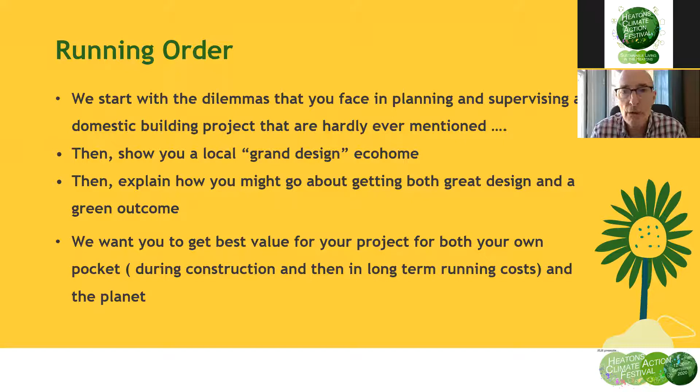So we start with dilemmas that you will be facing if you are planning to do a project, domestic or otherwise, and that's the running order. Then we intend to show you our grand home, the one that Steve has done. Then we'll get into a longer explanation through Sarah about how to achieve great design and a green outcome. In all of this, we want to get best value for your project, both for your pocket during construction, and in the long-term running costs. And if we achieve that, then of course that will be beneficial to the planet anyway.

So the Green Buildings Council, in a report a couple of years ago, reckons that the UK's 28 million homes really are not future ready. By that, not ready for the future that the government has said we should have by 2050 to be carbon neutral. Our homes aren't compatible with a climate change future, and they're going to substantially undermine the UK's ability to reduce its carbon emissions if we don't start changing.

Overall, the English housing stock has an average EPC rating of only D. That means most homes are leaking energy badly. They're incurring higher energy bills than they need to, and there's a whole set of associated detrimental impacts for many people. However, change is upon us.

That change isn't necessarily one we want to hear about, because it's about space heating costing us more. North Sea gas will be running out. Many of you may not know that boilers for North Sea gas will no longer be installed in new homes from 2025. That's not very far away. And at Greater Manchester level, the projections suggest that we have to have much more energy efficient homes, a lot more electrical heating from heat pumps in our homes, and that there will be some boilers using hydrogen gas by 2038.

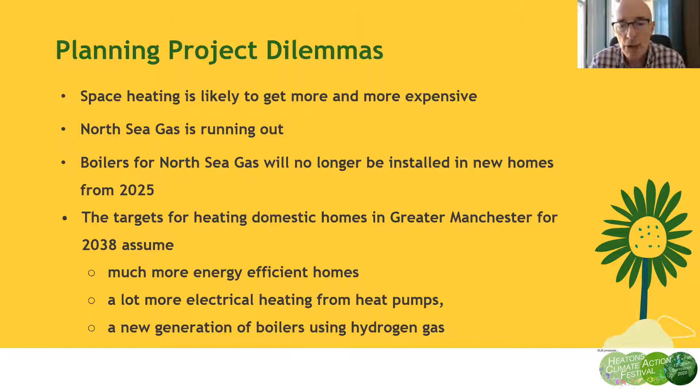So there's an energy challenge going on. The retrofitting of our existing homes is the biggest challenge in transitioning the UK built environment that there has ever been. At a personal level, most of us can only afford to improve our energy efficiency over time. So as we repair and improve our homes, there's an opportunity on each occasion to do a little bit each time to improve the way that we green our properties. So we hope this presentation is going to help you do that.

Within the Greater Manchester energy targets, bearing in mind Greater Manchester's seeking to make the city carbon neutral by 2038, they have taken an approach they call the fabric first approach. This is about building design and reducing the amount of energy required to heat a building. They say the first priority is to prevent heat loss through walls, floors, roofs, and openings. To do this requires greater and better performing insulation, an airtight build, and design to avoid thermal bridging.

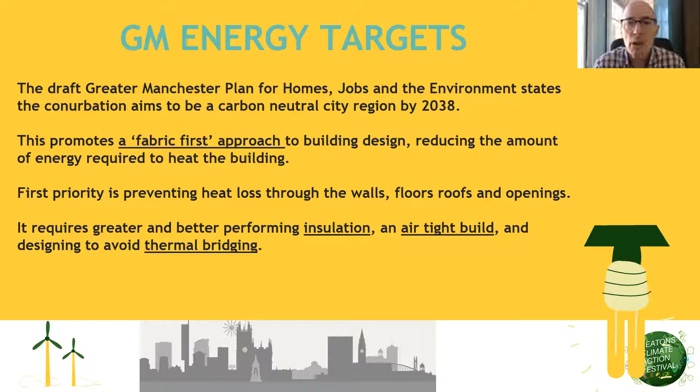So what do all those words mean? I want to give you an example that comes back to us personally as individuals. First of all, can you imagine you're on Heaton Moor Common at the moment? It's November, there's a cold wind blowing, we're outside, we feel cold. What do we do first? We check our clothing, we consider how we're dressed. If you were in your own home, you'd be doing this in a different way but in the same sense - looking around you and checking doors, windows, gaps and drafts. Broadly speaking, you'd then be taking a fabric first approach.

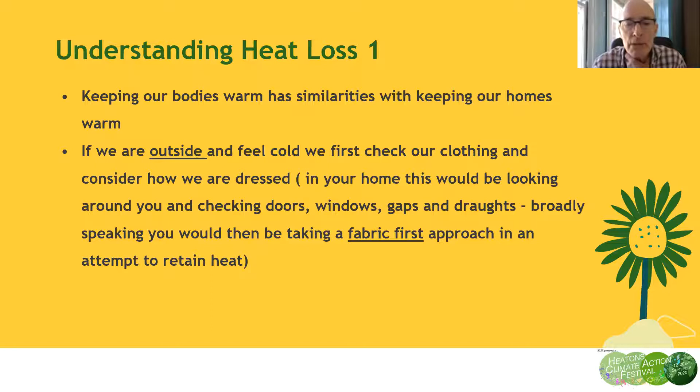So that didn't make us feel any warmer. We're still cold, so we put a jumper or fleece on. In our home, we'd call that adding insulation - putting something warm against our skin where before it was cold.

Once again we're not feeling warm enough, so we put a jacket on and zip it up to retain the heat. Still we're feeling cold in certain places, around the neck and hands, so we put a scarf and gloves on. That is what we call avoiding cold bridging.

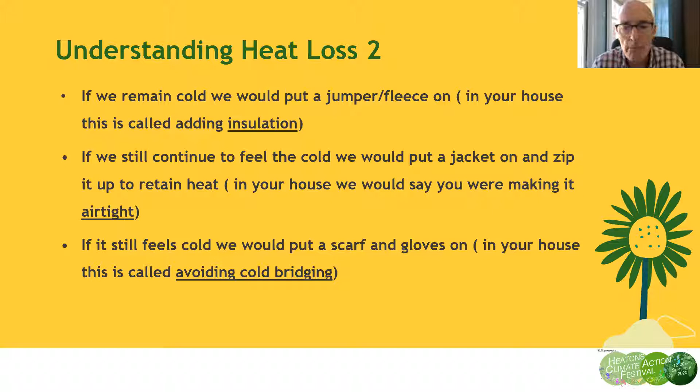So there's the three words I'm introducing you to: insulation, air tightness, and the avoidance of cold bridging.

That's understanding heat loss 3. But what about moisture? We have to consider moisture in all this. If you were exercising indoors, you'd take measures to ensure any sweat and evaporation could be carried away.

We do this to avoid both smelling and condensation occurring in our clothing. In your home, you'd be doing this as well, but to avoid smells from cooking and moisture from baths, showers, and washing. We do that usually by opening windows or putting mechanical extraction on to take the damp or smelly air out of the house.

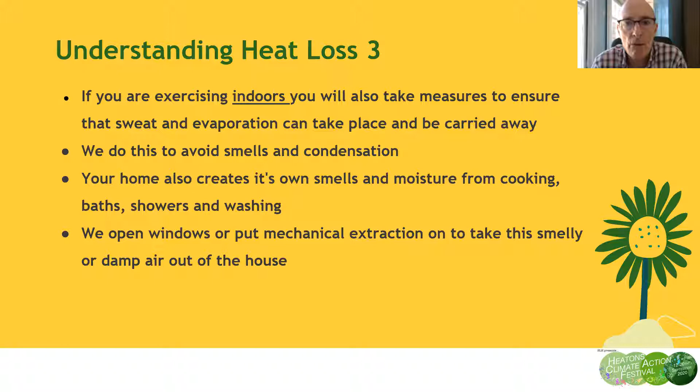Most older homes leak considerable amounts of air all of the time. Certainly anything built in the Heatons that hasn't had considerable work done to it recently, built before about 1960, would be leaking considerable amounts of air. Even some newer properties to the end of the 20th century are still considerably leaking.

So we've got to do more to improve the ability of our homes to retain heat, through this combination of insulation, air tightness, and elimination of cold bridges. We can avoid the moisture problems if we apply foresight to our project. This requires knowledge, good design, and you'll achieve a comfortable home without all sorts of difficulties.

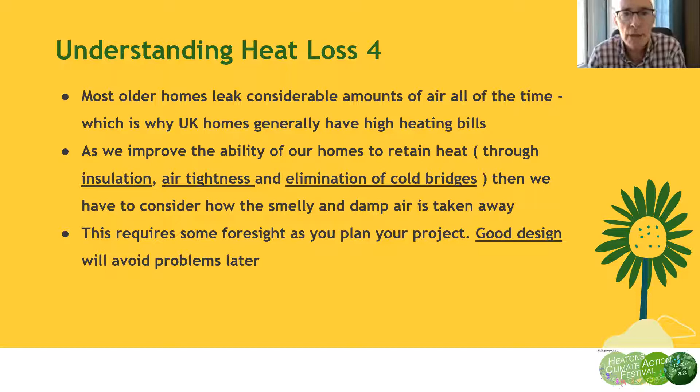What now follows is a video. This is how one Heatons resident, Steve Howarth, has risen to the challenge of creating a light and spacious home, one that at the same time is outstandingly energy efficient. We hope this will inspire you.

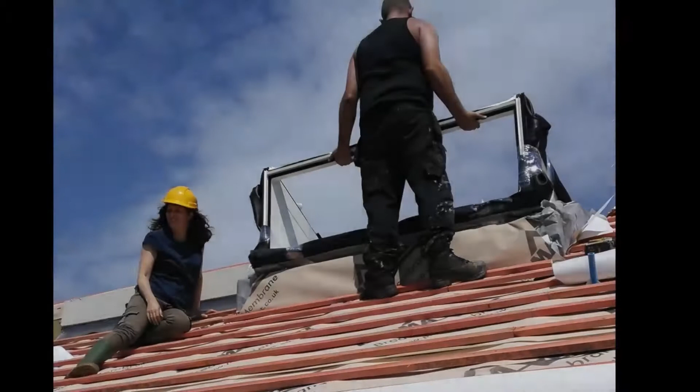Since a young child, I've always been surrounded by the building trade. My father and grandfather both builders, so we always moved house being developed. I've owned two houses myself, which we bought and developed from scratch, complete refurbishments. But it was always my passion to build my own home. So with that background knowledge, I decided that one day I would build my own home, and when the opportunity came here, that's when the process began.

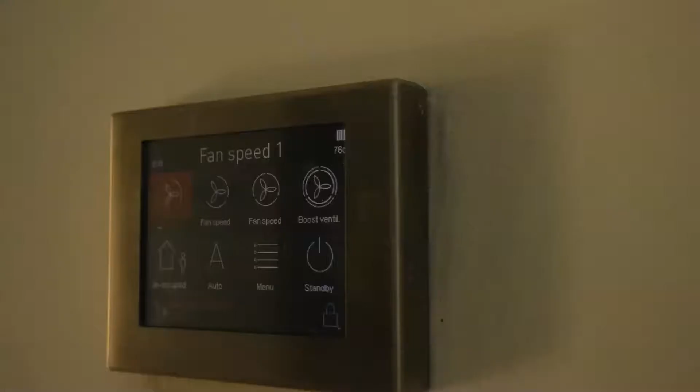Once I decided that the opportunity might arise that we could build our own house, we started doing a lot of research. I just wanted to build a house that was as environmentally friendly as possible, which meant one of the main aspects would be that it would be as energy efficient as possible. So to build an energy efficient house, you have to build a super insulated home. So one thing led to the other.

Once we decided we wanted to build a super energy efficient home, I really looked a lot into the passive house process, which was designed in Germany at the Passive House Institute, all about building super insulated, energy efficient homes. Once we decided that was the process we were going to go, I was put in touch with a local architect, Sarah Darwin, who had just graduated in Passive House Institute. So we got together, and that was the route we went.

So Sarah designed the house, and it was all about its functionality and fabric-first approach. That really instigated what the house would be built from and what it would look like.

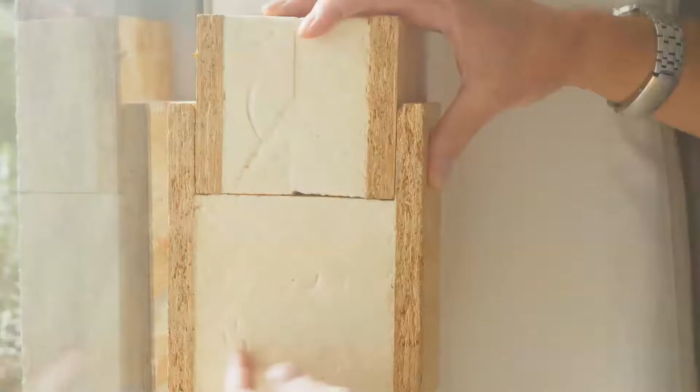As I mentioned earlier, the house is a timber frame construction. It was built using structural insulation panels, or SIPs as they're known in the trade. A SIPs panel is basically compressed insulation between two 8x4 boards of OSB. We chose SIPs panels because of the speed of construction and their super insulation value. Basically, a SIPs panel is erected around the house, and in this case we added an extra 120mm insulation on the outside and another 80mm on the inside, which gives us a wall thickness of near to 0.5 meters. That's what creates super insulation homes.

As well as the walls, windows are an important factor in highly insulated homes for airtightness. In this house we've used triple glazed windows throughout. The result has been that the house is very, very warm. The temperature here never drops below 18 degrees, winter or summer, which means the heating invariably only ever comes on for 3 to 4 months every year, and it just tops up.

So it's very energy efficient, which means we qualified for renewable heat incentives and the feed-in tariffs, so our net bills are less than £12 a month. Our standing order payments are £42 a month, but we get £30 back in feed-in tariff and renewable energy incentives. Had we built this home earlier, we would have been in positive equity on it, positive bills - the energy companies would have been paying us. Just too late.

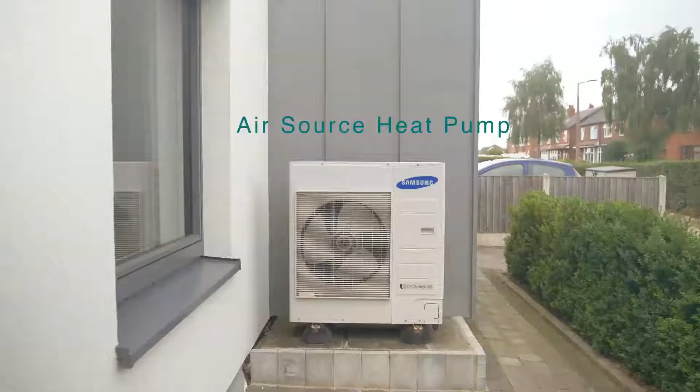Building a sustainable home, it was also important to us that we got away from using fossil fuels and only use renewable energies. As part of that, we chose to go off gas, so we only have an electrical supply. The electric for powering the hot water and the heating is driven by an air source heat pump, which is a popular choice in sustainable homes. Plus we have over a 3,000 watt array of solar fitted on the southwest facing roof, which generates a high proportion of our electric on warm days such as today.

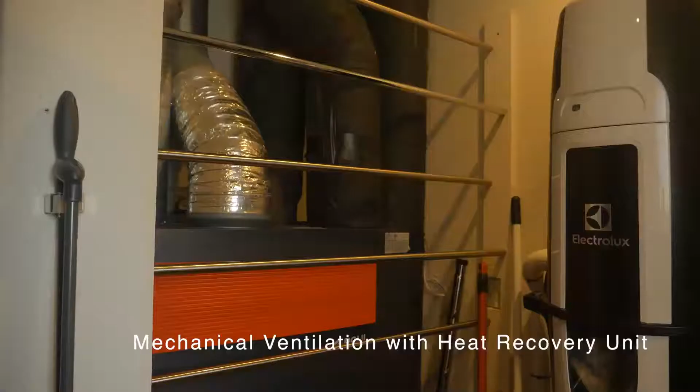Another aspect of a super insulated home is that you have to use a mechanical ventilation with heat recovery unit, which is basically an air exchanger. This means we have to draw in air from outside the building and keep replenishing the air inside so that we don't get stale and stagnant air.

Thank you for watching, and I hope it's useful to you when you embark on your next grand design.

Wow, that was wonderful. A real challenge to us. So just bear with it a second.

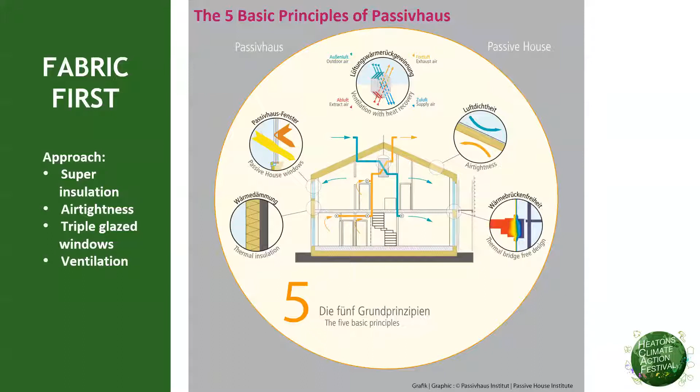Air tightness is something we're going to talk about today, which isn't always mentioned so much, but we lose a lot of heat through infiltration through the building fabric. And then finally, perhaps a new phrase you'll learn today: thermal bridges. We have to design a thermal bridge free technical solution.

We all know that the home renovation industry is booming. There's skips on every street and builders' wagons all over the place. Every bit of renovation that anyone does gives you an opportunity to look at how you could increase the level of energy efficiency of your home.

So three things really that we'd like you to consider when you're doing these projects: insulation—can you increase the insulation of a room you're doing?—air tightness, and ventilation. I think what we're trying to show today is that those three things go hand in hand, and we have to consider all of these things when doing these projects.

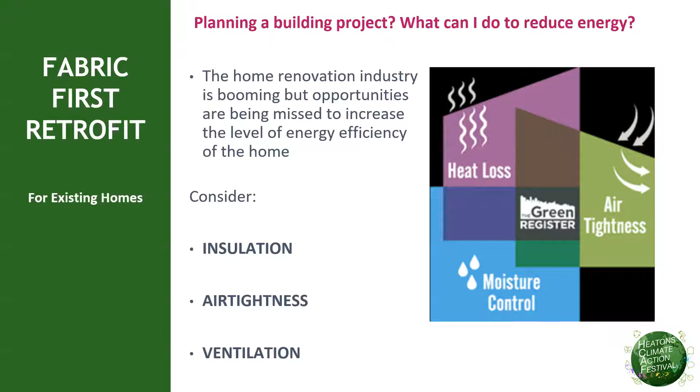This is a project I did a few years ago, and I was lucky that the owners had bought a house they weren't moving into. They were in rented accommodation, so they were able to look at the whole house, and we did a lot of measures—roof insulation, walls, and even the floors we insulated.

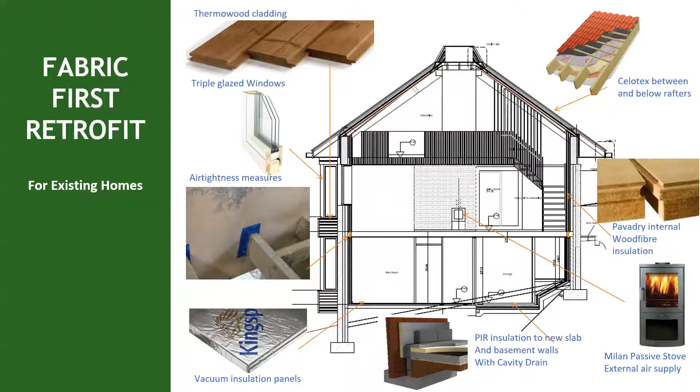There's a lot of products on the market these days, so if you want super thin insulation, there's vacuum insulated panels. This house, we were able to really go back to the bare bones and bring it up to modern specification. But we're not always so lucky to have that full run at it, because normally you're living in the house while people are doing the work.

So I think the first thing to think about is insulation—it's about insulating as much as you can when you have the opportunity.

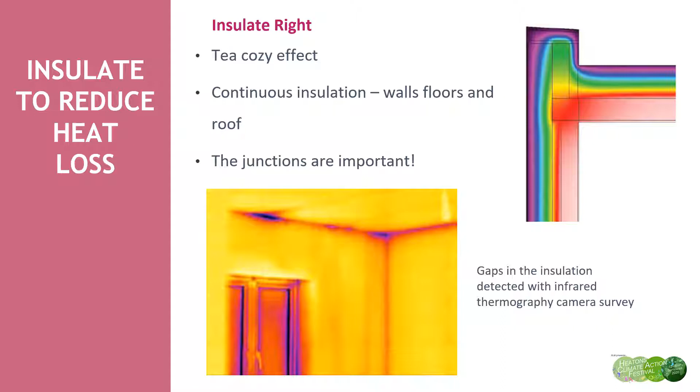So you're going to insulate, but where's the best place to put your insulation? Ideally, and the easiest way, would be to put it on the outside of your building—again, like the tea cozy. The advantage is you're not losing any space inside your house, and it causes fewer concerns in terms of building physics. What we talk about is trying to keep the structure of your building warm, like putting on your coat or a big woolly jumper. It also makes it easier to avoid thermal bridges because you're wrapping insulation right round the outside of the building.

However, we live in the Heatons, and there are often conservation concerns or listed buildings, so you might not be able to just put insulated render on the outside of your building.

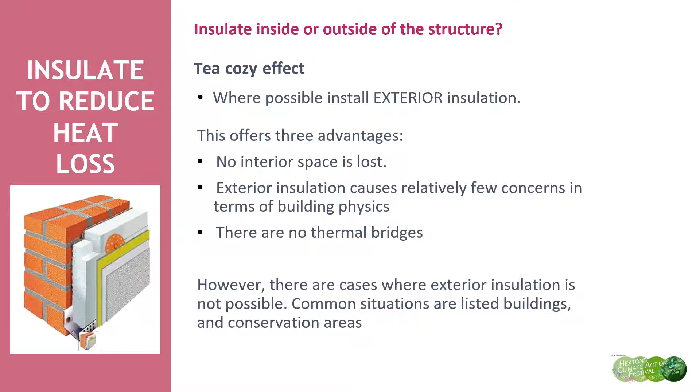If you're in a conservation area, you can't change the appearance of the outside of your property, so you're probably looking at putting internal insulation in. Now this is more tricky. It has to be really well thought out, and there are some disadvantages. One of those is the loss of space in your room. You might want to put 100 mil of insulation in there, but you don't want to physically lose that space off a living room. So you've got to balance those things.

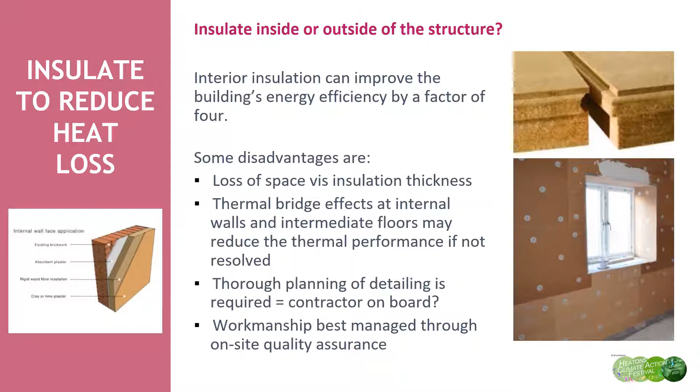The other thing is the thermal bridges we've talked about - again, it's harder to achieve those. You've got to really think about the details, because every time you come to a floor, if you're just insulating up to the ceiling, you'd have a break at every floor level, which is something you want to avoid. So it needs more planning, and you need to talk to your contractor to make sure they've thought about all those things and don't leave you with problems afterwards. And workmanship - you've got to make sure the quality on site is good, so you probably need somebody overseeing it for you.

The other thing about insulation and all these measures is thermal comfort in your home. Without getting too technical, radiant temperature asymmetry is where you've got a temperature difference, and you will feel a difference of more than 4 Kelvin. So we design to make sure you don't get that. If you've got a warm ceiling and cold feet, or one side of your body colder than the other, you will start to feel that - you'll feel drafts and things.

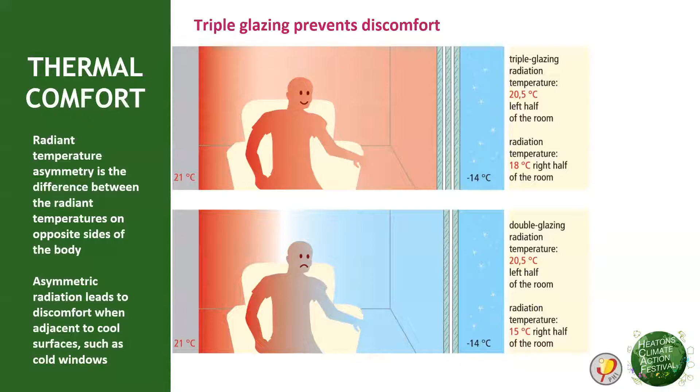The classic one is your windows. With a single glazed window, even with your heating on, if you've not got any heat source next to that window, you're going to feel a temperature difference next to it, because the radiant heat is going to be much colder. So in Passive House, we're looking to achieve triple glazing, because it takes the temperature of that surface up so you won't feel this difference. Sometimes you might not be able to go as far as triple glazing, but even double glazing gives a smaller temperature difference - though you might have to supplement that with some extra heating below that window.

The next thing I want to talk about is moisture control. Now this is where it does get tricky. Myself, I have to think about these things from first principles. But when you start adding insulation to your home, or thinking about air tightness, it does start to alter the balance of your heating and ventilation. So these are things we have to consider - it's not just doing one in isolation.

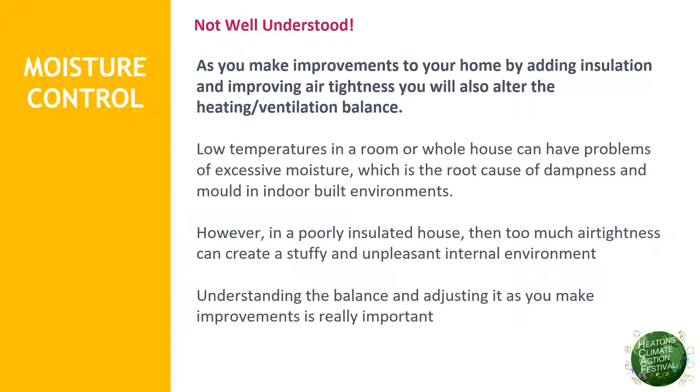When you're getting low temperatures in a room, or even the whole house, there can be problems with excessive moisture. This can cause dampness and mold, which we know is not good for your health, amongst other things, and not good for the structure. So if you then make your home more airtight, but you're still in a poorly insulated house, too much airtightness can create a stuffy and unpleasant internal environment. So we need to think about ventilation, opening windows - it's a balance, and adjustments need to be made to make sure the environment inside is good.

So a little bit about humidity and relative humidity - I'm trying to make this as simple as possible. Air can hold a certain amount of moisture, and colder air can hold a smaller amount. So if you've got a set amount of water vapor at a lower temperature, that might be 100% relative humidity. But as the temperature goes up, the air can actually hold more vapor. So if you keep water vapor the same and raise the temperature of the air, you'll see the relative humidity will go down.

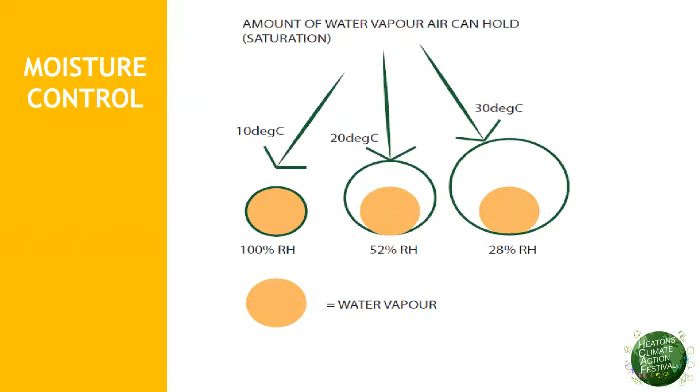Going back over that concept, the amount of water vapor that air can hold is called the absolute humidity. Relative humidity is the percentage of water held by the air compared to its total capacity. When air reaches the maximum amount of vapor it can hold, that's called saturation, and that's where vapor condenses out of the air. Temperature affects relative humidity - with a constant amount of water vapor, as temperature rises, relative humidity decreases, which might be a good thing. But if the relative humidity is too low, the air feels dry. So there's a range we're trying to work to - we want relative humidity in your home to be between 35 and 65%.

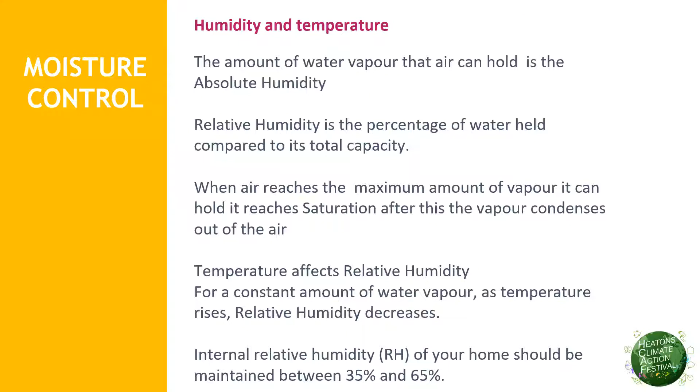So we have to consider what the sources of moisture in the building are and how we control those things. People are one of the main sources, because we're breathing and perspiring, we're cooking, washing clothes, drying. If you don't have an external vent on your clothes dryer, that's going back into the atmosphere. Dishwashing, boiling the kettle, and bathing - that's what we generate as it being in our houses.

But also the building itself, there's moisture which we need to consider before doing any renovation works. You need to consider: are your gutters leaking and are they saturating your external walls? Is there groundwater? Is there rising damp? Do you need to put some more gullies outside your property so the water isn't just splashing up and saturating the external walls? And then there's condensation on surfaces - we've all seen that on single glazing, where you end up with a pool of water in the morning at the bottom of your windows, and that could start rotting the timber.

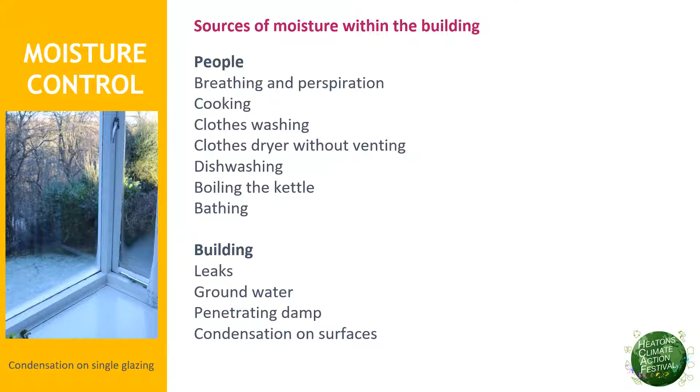So an example of water vapour and how that works is if you're having a shower in an unheated bathroom, you generate steam. So the warm water vapour is held in the air. When it starts to mix with the cold air in the bathroom, this results in the water vapour condensing out into a liquid form. As it cools down, it can come into contact with a cold surface or colder air. A cold surface in the building will begin to show dampness as condensation forms and will become mould. I've certainly got a little patch on my bathroom ceiling where there's no insulation, and that's caused by condensation.

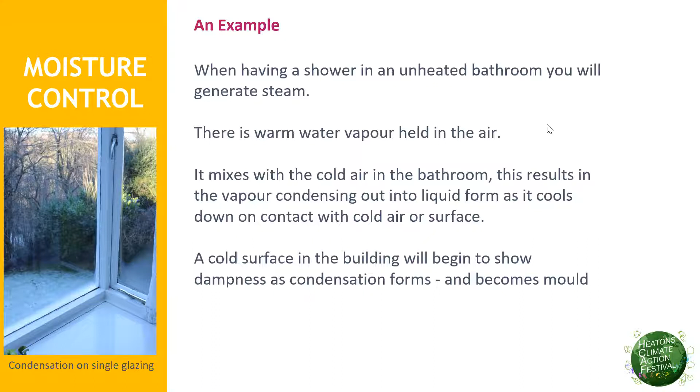So, as we've moved on, I think insulation is increasing and it has an effect. So just starting with probably what a lot of us are sitting in at this moment, Victorian homes. They're cold, drafty, and the heat loss through the walls is quite considerable. But it's been okay because there's a lot of natural infiltration - you've got gaps in the structures. Your basement is probably like a fridge because the cold walls are in contact with the ground, and also they probably don't get any solar gain. Your single glazing is letting in a nice draft. Your chimneys are taking a lot of the heat that you're pumping in to keep warm straight up the chimney.

So then in the 80s, we started to think about insulating. We've got cavity walls, some insulation in there, and we might have some nice loft insulation. But we weren't thinking about air tightness then. We probably didn't bother insulating the floors, and there's certainly gaps around there, and suspended timber floors are taking out a lot of heat. We started to think about ventilation and putting in a fan, but often people turn them off because they're very noisy.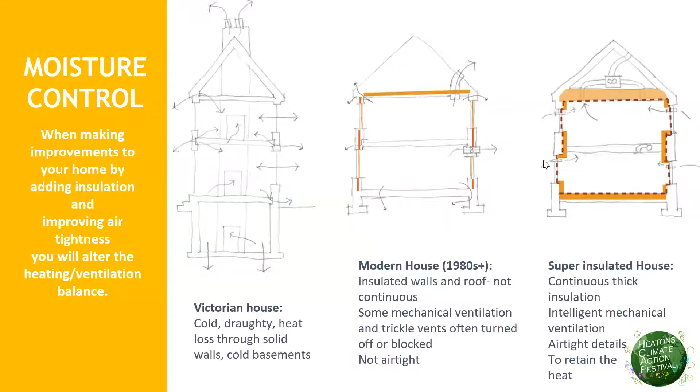So yes, this is the red line. As architects, we like to draw a nice continuous dotted red line on the sections. This helps the contractors and any tradesmen on site, if they all understand where that airtight line is. It can be a number of different materials - it could be the plaster on the walls internally, or it might be a membrane. There's a lot of intelligent membranes on the market now. And it might be the concrete slab of your floor. But it's very useful to just establish exactly where that is, so everybody understands that.

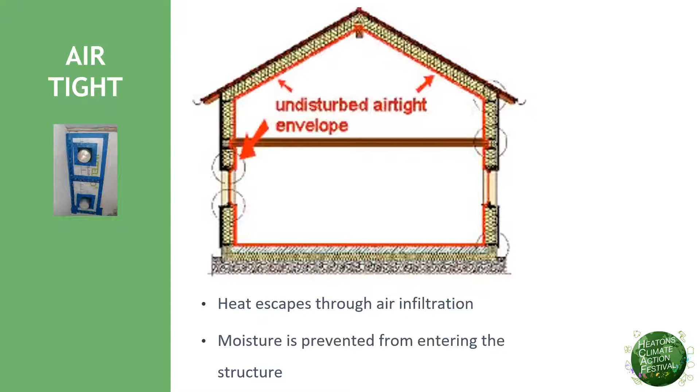Compared to building regulations, passive houses probably are about 10 times more airtight because it needs to be, and we're not really there yet with the British building regulations. If you think about a 50p coin, that is about the total size of air gaps allowed in a dwelling

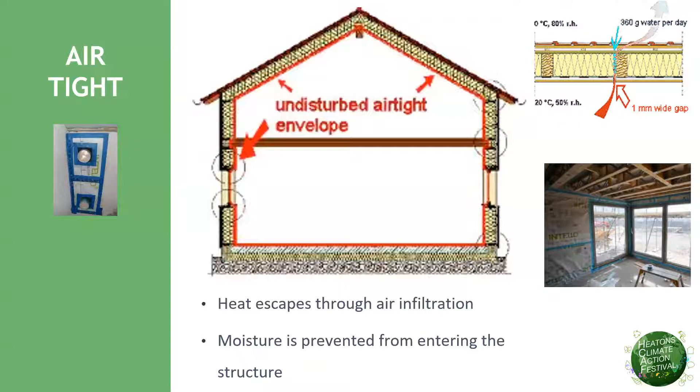So ventilation systems, I keep mentioning we need to ventilate. I think you saw in Steve's video, the mechanical ventilation heat recovery system, MVHR. What that does is it takes the warm air from the wet rooms, from the bathrooms and the kitchen. It extracts that, takes it across a heat exchanger, and pre-warms fresh air that's coming into the building, which is then ducted into the habitable spaces.

So you're not wasting that heat from those spaces, you're using it to preheat. And because the air coming into the building is preheated, you're not getting a draft anywhere. It's just pleasant, fresh air, so you don't have to open your windows. People often say to me, oh, you can't open your windows in a passive house, but you can open them if you want to. But if you have them closed, you're still getting fresh air.

And the other thing is that the MVHR will have a filter on it, so for people that suffer with asthma and hay fever, they've reported very positive results from this system. Next, please.

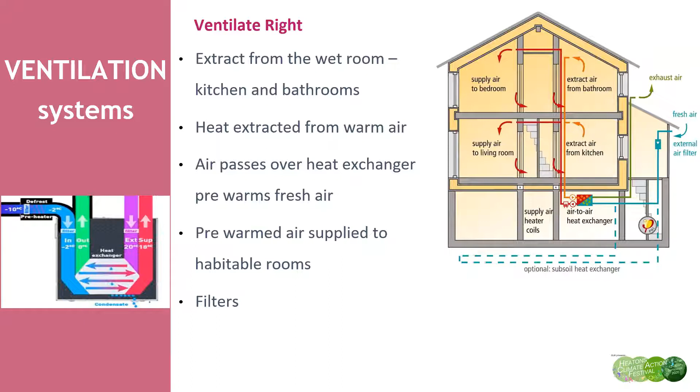You might not be putting in the full MVHR system, but there are still quite a lot of intelligent systems available. Demand ventilation is one of those, where it's an extract system with a central fan, very low noise, acoustically insulated fans. It extracts from the wet room in the same way, but the air intake is through your windows in the same way that a trickle vent works, but this is a bit more sophisticated.

It has a humidity blade, which once it senses humidity in the air, it opens the vent, and the air will come into the room. It will be directed towards the ceiling, so you won't get this cold down draft as well.

Aside from this system, there are also single fans on the market that do heat recovery as well. And also you now can get very low noise fans. I think quite often we don't like turning on the bathroom fans because they're so noisy, but there are much better products on the market now. Next, please.

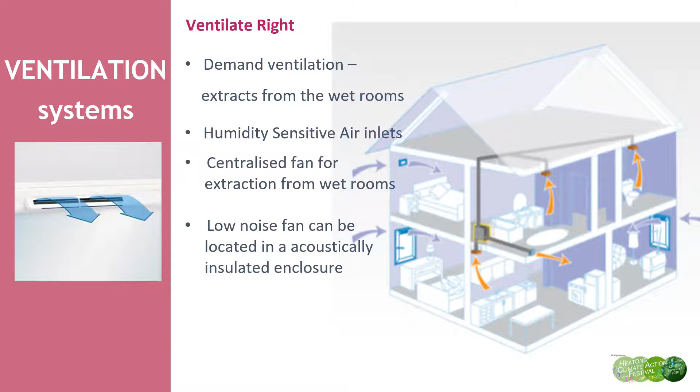So we're just going to run through some common home improvements that people carry out and things you might be able to consider. The first is a loft conversion, and then we're going to look at kitchen extension and internal remodeling.

So before you start, prioritise what you can towards your building fabric upgrade, and try to optimise your budget in terms of finding out what the most effective measures that you can achieve for that. That might be asking someone to do some heat loss calculations to actually measure and see in terms of what you get for your money, which would be the best solution.

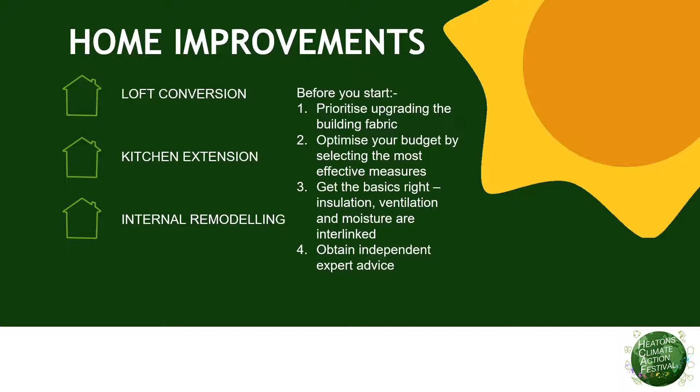And then get the basics right: insulation, ventilation, and thinking about moisture. If there's 3 things you take away from this, I think those 3 words are very important. So ask the question when the work's being done, and if you can, obtain independent expert advice. Companies will always want to sell you something, so be wary speaking to the manufacturers as they are selling you something. Next, please.

The most basic one, I suppose, is loft insulation. If you're not doing any renovations, you probably don't have the maximum amount of insulation at the moment in your property. So you might want to think about these raised storage systems, so that they don't squash down that insulation you put in. They're kind of like on a rail system attached to your ceiling joist, so you can still use your loft for storage but put a lot of insulation in there.

Also think about your loft hatch. You can get an insulated loft hatch with air tightness as well, so you're not just puncturing all that great insulation you put in. And when you insulate, again think about the air tightness - is your ceiling airtight? Are there gaps around the edges? Because you don't want the moisture from your home passing up into that space.

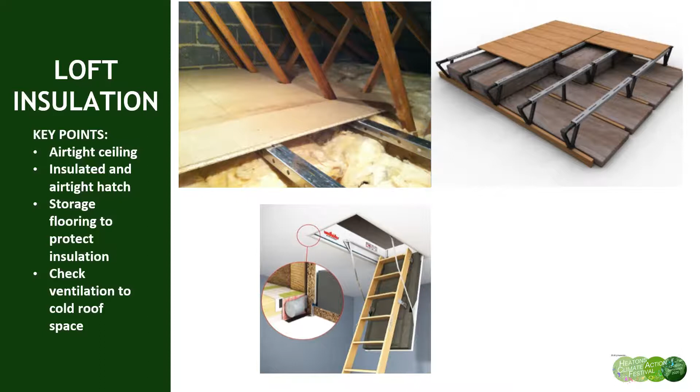You might be planning a loft conversion, in which case you're insulating along the rafter level. The illustration here is using a nice flexible natural material - it could be mineral wool or glass fibre. It's flexible, so it fits really well between the rafters, so you don't end up with any gaps. Then underdraw that with an additional layer, probably a high performance PIR insulation, because your rafters are thermal bridges - the thermal conductivity of the rafters is not as good as your insulation. So if you can get another layer underneath, only a thinner layer, that will help achieve a very good U value.

And again, thinking about air tightness, you can actually install an airtight membrane. On the right there is a photograph of an Intello air tightness membrane. I say it's intelligent because it does also allow the structure to breathe. The products are always advancing, and there's a lot of really good products out there if you want to research those things.

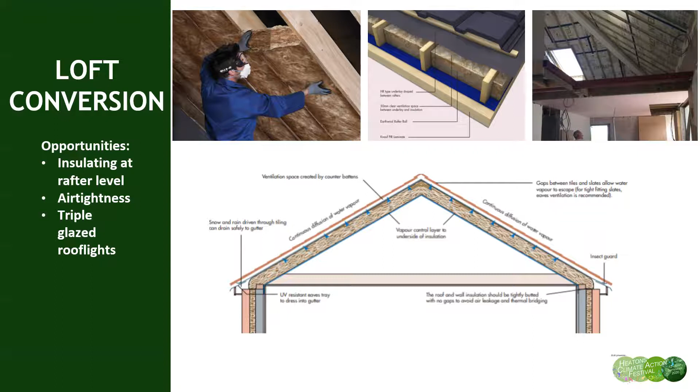A lovely couple came to me asking to do a kitchen extension for them, but obviously once you look at one thing, you have to look at the whole house, and it became apparent there was a number of areas we could improve as well.

The windows were all single glazed. The conservation area officer obviously had a lot to say about this - we did put it on the planning application. We were able to use a conservation style triple glazed timber window that the conservation officer was happy with. So although you don't have to use triple glazing, I would always suggest that you ask for a quote for triple glazing as well, because demand is increasing and the cost is coming down.

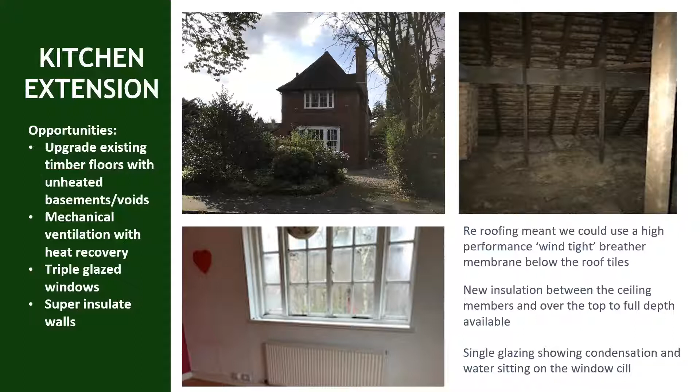Other things we were able to do then was to introduce new mechanical ventilation for the kitchen, a new kitchen and utility room, and triple glazed bifold doors, which I'll show you a bit later, and insulation in the new walls of the kitchen. You don't have to just stick to building regulations minimum - you can go a little bit further, because if you're doing it at that stage, it doesn't cost that much more. So always ask the question, how high can you insulate your walls?

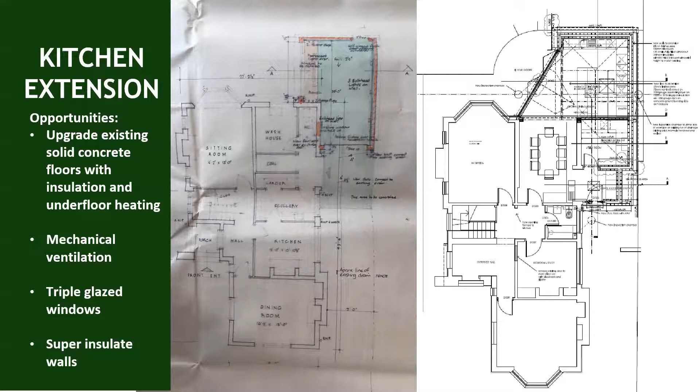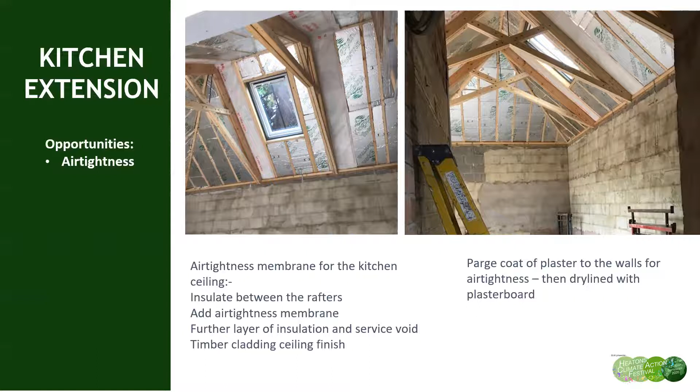You know, if you ask the right questions, and if you've got a good builder, they should be prepared to look into new ways of doing things, because things are always changing. What you want is somebody that's going to work with you.

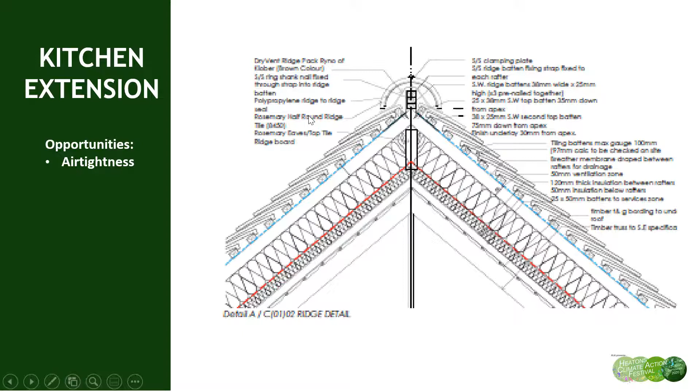How am I doing for time? Please tell me to hurry up if you need to.

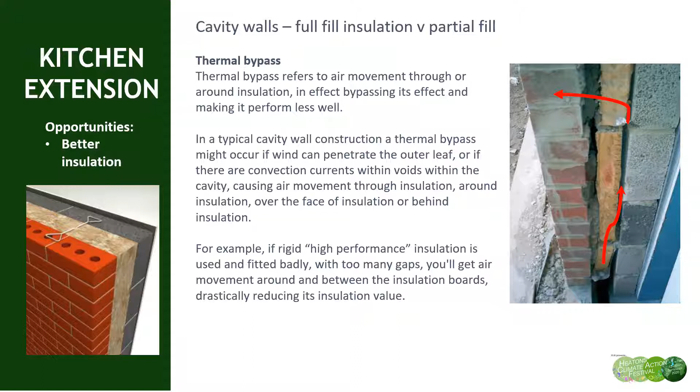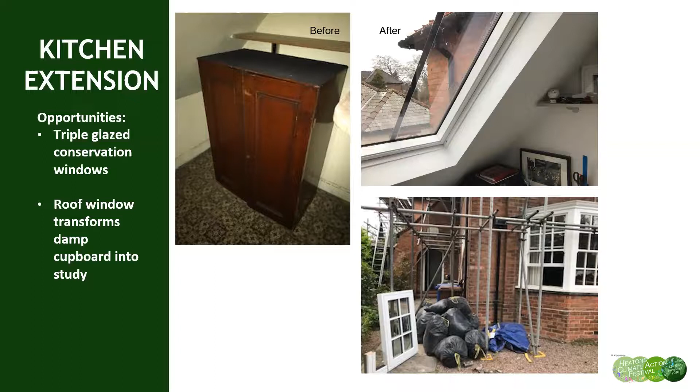This was just to show that when we re-roofed this house, there was this small little cupboard, dark and damp, but with the roof now re-insulated, and we put a roof light in there, that became a nice warm office space. Also, about the windows, window companies should give you samples and allow conservation officers to look at them, but you can get performance as well as heritage. That's what I'd say. Next, please.

10 minutes, Sarah. Okay, all right. I don't know how I'm doing. Oh, we need to go fast.

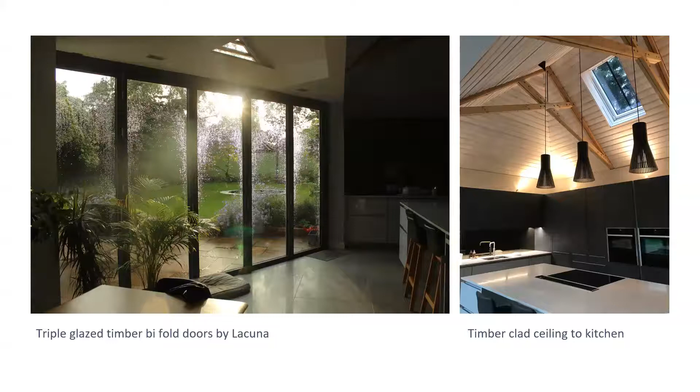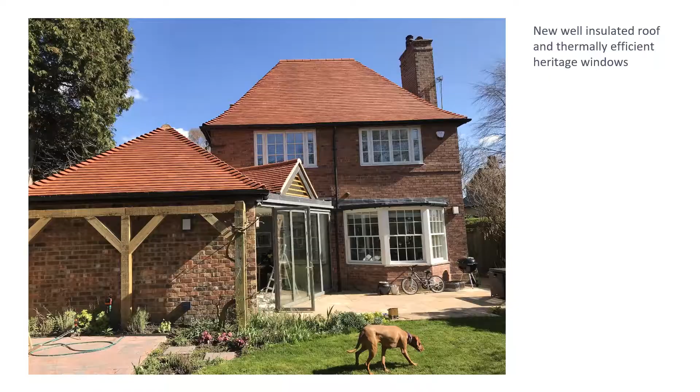And yes, again, that's the re-roofed property with the heritage windows there from the rear. Next, please.

So if you're only just doing a little bit of internal remodelling, I'd say a lot of our houses in the area, the Victorian houses, have got suspended timber floors. This is a good opportunity to put some insulation, if you can, from your basements below, but you might just have a crawl space. A good way to do this is to hold the insulation in place with a breather membrane, because this does allow the structure still to breathe.

But I would suggest putting in additional vents into that floor void below, and to think about any services running through the void, as they will need insulating, because they'll be much colder once you put the insulation in. Next, please.

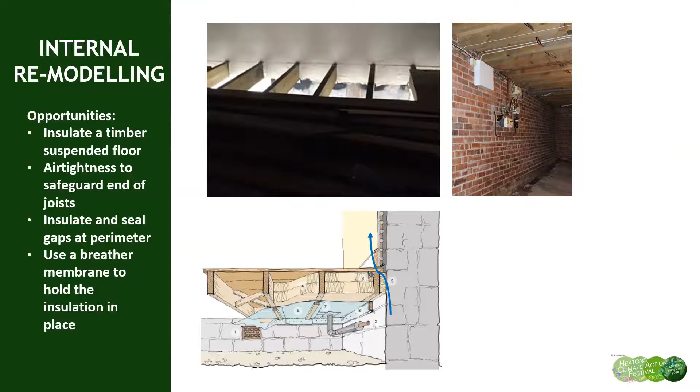So when you're thinking of your whole house retrofit, or even just a little bit of retrofit, think about the maintenance you might need to do before you start any work. I know this is the really boring bit, but if you've got any damp or any leaks, now's the time to look at that before any thermal upgrading starts.

Next, I'd say consider moisture, the passage of moisture. If you can get a survey done by an independent company, I'd stress that, because people selling damp-proof products want to sell those to you, so if you can get somebody independent to do that, and look at the things you need to remedy before you start.

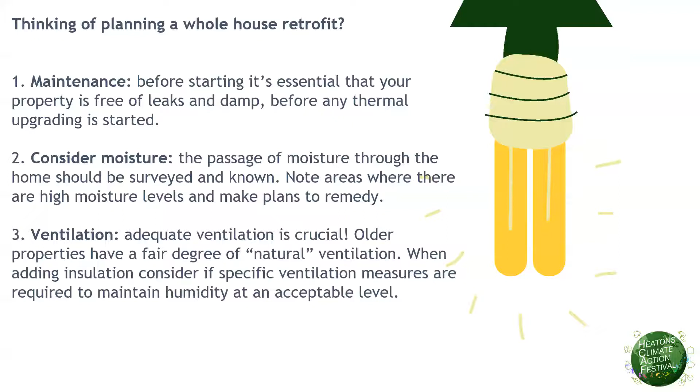And then ventilation, it's crucial. Although older buildings have natural ventilation through the leakiness, you will be altering that as you start to put insulation in, and you do need to think about whether you need to upgrade your ventilation measures in the house to maintain an acceptable level of humidity. Next, please.

Think about your materials. With older buildings, I would really consider using breathable insulation, and there's a lot of products on the market which we're happy to make suggestions about afterwards if people want to know.

And then sequencing of the work. If you can't do all the work in one go, which most of us can't, do think and consult with professionals in terms of how you're going to stage those, because if you put your external insulation on and you don't do your windows till later, then you're possibly going to be undoing some of that work you spent a lot of money on. So you really need to have a plan on how you're going to do this.

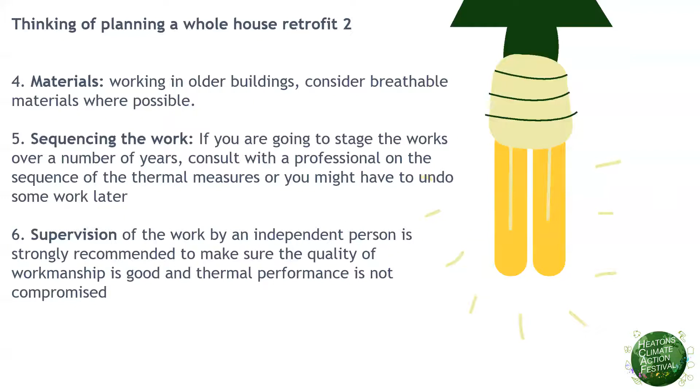And then supervision is so important. Again, try to use somebody that's independent and going to make sure that the quality of workmanship is good. You pay a lot of money for these works, and you want to make sure that thermal performance is going to be working as it's supposed to. Next, please.

People are probably aware there's a Green Homes grant that is starting imminently, and you can apply up till the end of March. You're going to be eligible for a voucher. You have to pay some contribution towards that, but we think it's going to be a maximum of £5,000 contribution. I think you get up to 2/3 of the cost. The aim of the scheme is to promote energy efficiency and boost the economy by creating jobs.

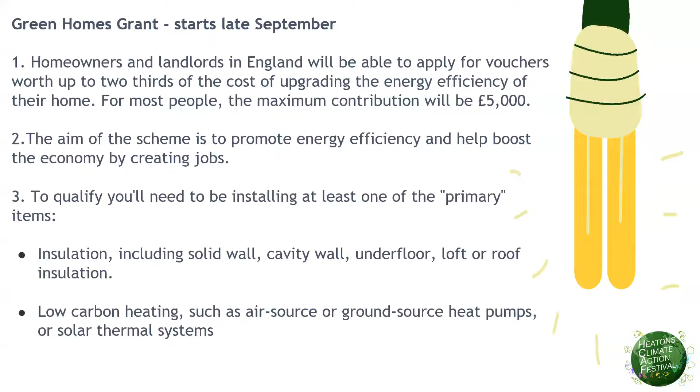You have to be installing one of the primary items, and these are the insulation - solid wall, cavity wall, underfloor, loft or roof insulation - and low carbon heating, such as an air source heat or ground source heat pump, and solar thermal systems. I think what we'd say is do look into these, be cautious. It's a self-certifying scheme for the work, approved installers only. So if you're doing larger works that might not tie in so well, please talk to your contractor about how you might take advantage of those grants that are available.